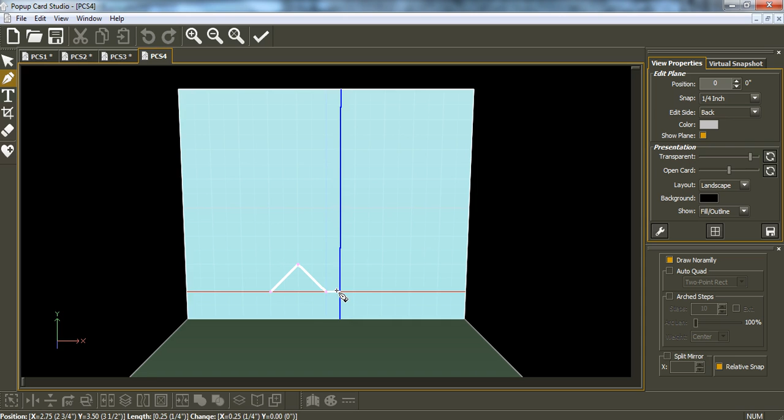So we click here, click there, and click an inch out this way, click, and then I come out and take it around to make this shape. Clicking, not dragging. Click, let go, click on the next one, and so on. So what we end up with is a shape that looks like this.

If I now take the snapping back down, I've got more control over what size to make it, and I'll show you a print preview of this now. If this was to cut, it would cut all out and it would fall out.

Now, before doing a duplicate of this, we're going to use the hinge method. So we click on the hinge and we have the bottom, which is now going to give you a hinged look. We go accept. So if I look at this now, this is what we've just done.

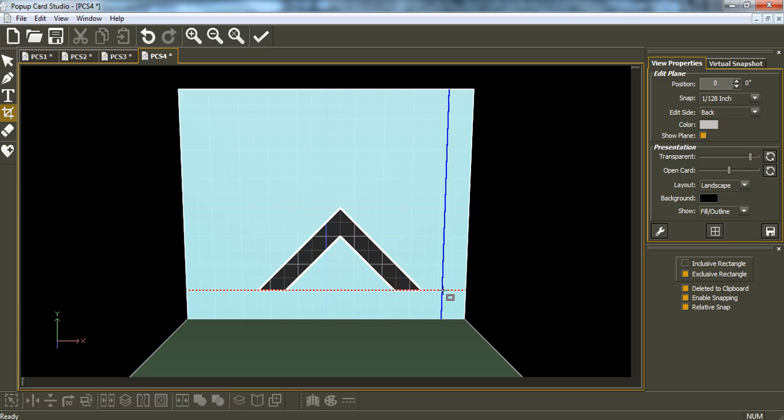Nope, it didn't work. Maybe I wasn't quite straight there. Okay, did I have that selected? When that's selected, I go hinge, accept.

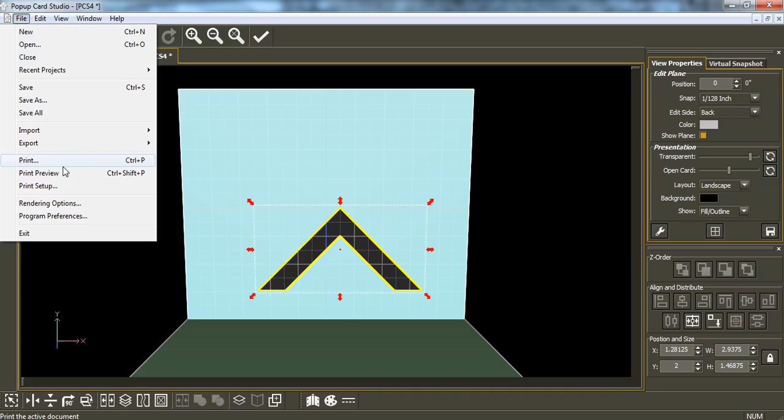And now we'll go print preview. So now what you have, since I didn't have it selected before, you have these cut lines up there, down there, up there, and down there, and it's going to give you a score line at the bottom to fold over.

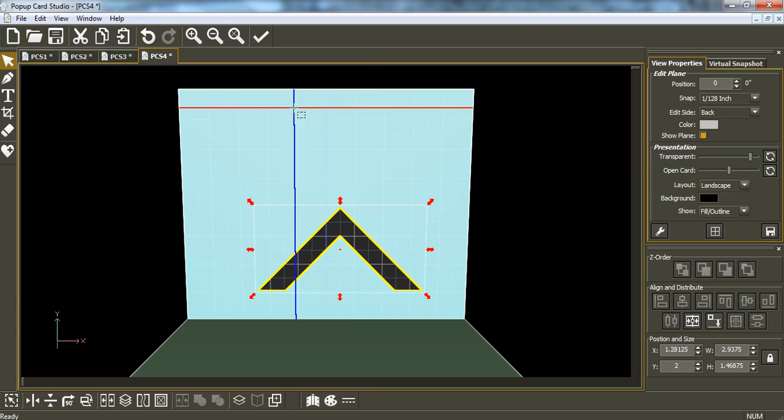So now what we do is we select that, we take it up to the corner, and we put it about the size that you would like it. You can play around with the size even after you've duplicated it. With that selected, you go duplicate, and we go accept.

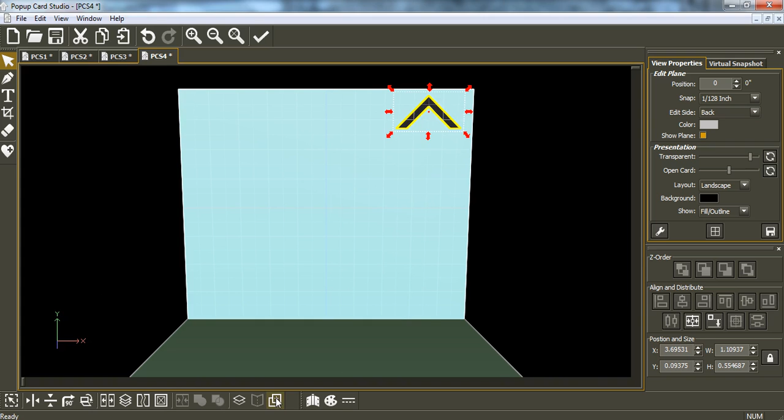And we can resize that, resize it to how you'd like it. So now that's finished. If I show you that in the print preview, it's going to cut up on the top part of the triangle and in the middle of the triangle. It's going to leave these as score lines, and then you have it. So that is now ready to go.

I'll show you, this is not in the making of it, but I'll just show you the outcome that you have. Picturing that this yellow bit that is selected is going to be what's folded down from here. So this will be cut, folded down, this becomes the yellow bit, and it gets tucked under this innermost V that's left there. And so on down the track.

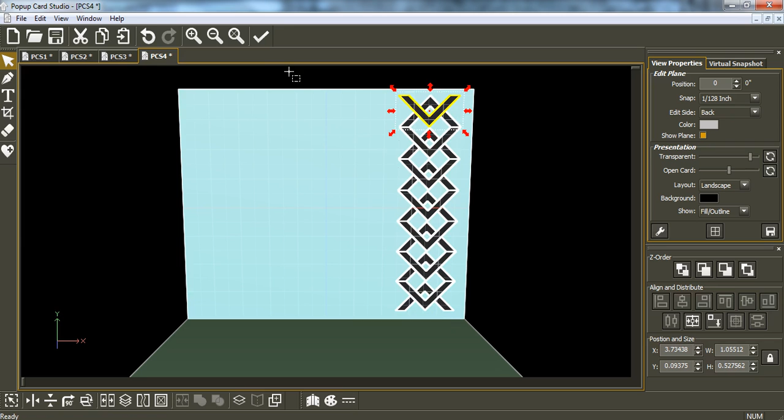And then I take that and put that up there. So that's what you have. So that is now finished.

You aren't limited to just triangles. If we get a new one, and we go on a plane of 0, I click out and zoom in so you can see, what we'll do is we'll get a shape. What will we get today?

We'll get an octagon. No, we'll get a hexagon. So what you do is you now shadow that.

Pick a decent shadow, and go accept. Then select both of them, and go join. This is important - join. Select them both and join.

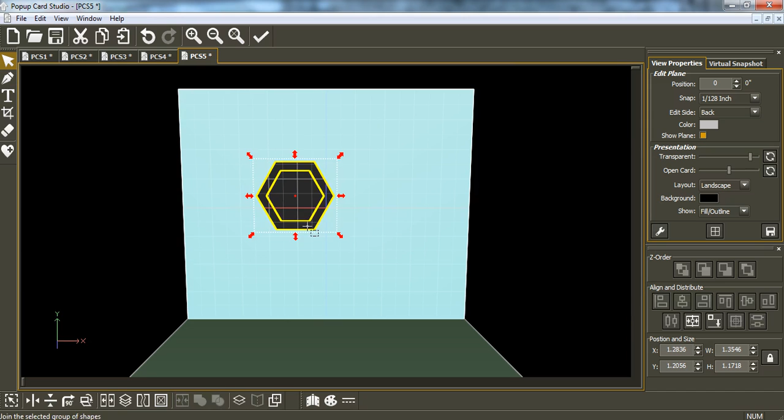Then what we're going to do is chop that in half, because we don't want the bottom half, we only want the top half. And now, what we do is make a hinge of that.

Go accept, and I'll just check before we get any further. Yes, that is a hinge. We go okay, we put that into position. We might want it over here and possibly smaller.

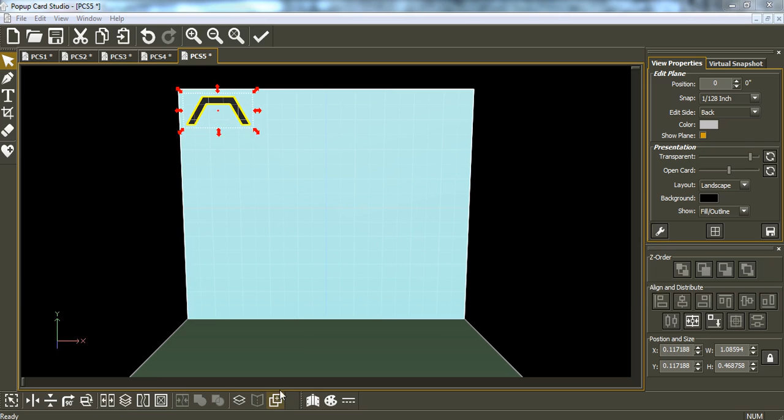So I now duplicate that, and go maybe one up one more, and we go accept, and we put that where we'd like it, and there we have our next lattice.

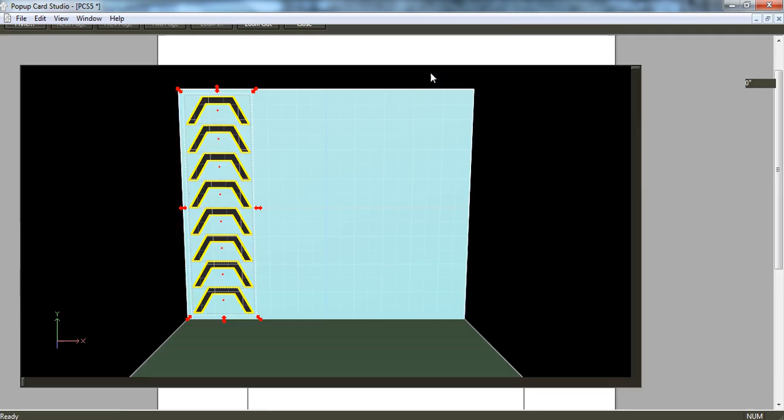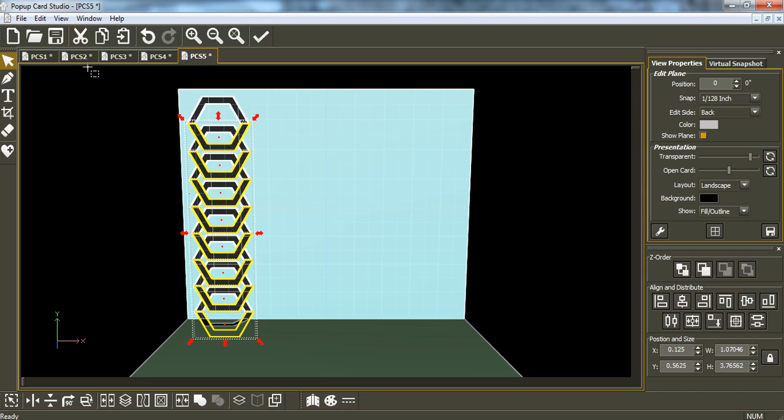So then this one folds over, and this gets tucked under the center of this one, and so on down the track. I'll show you that just by copying that, pasting that, and flipping it. So this would be folding out of there, and it comes down and gets tucked under this one here, but on this one.

That's all there is to making the lattice in here, and the benefit of doing it on here is you've got the score lines to fold, and you'd have your pop up here and other things, and this is just in the background.

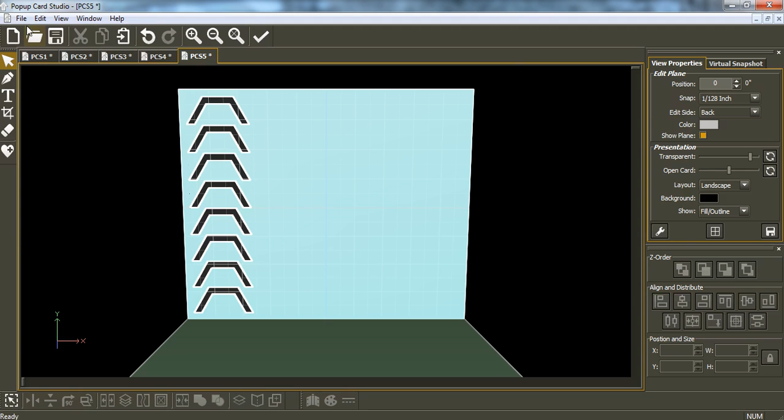Now, if I say I wanted to take that over to make the cut, I would go project render, save as SVG, and I call it hexagon lattice.

And then what I do is go to make the cut, I go import, and I look for the hexagon lattice, and there we have our card.

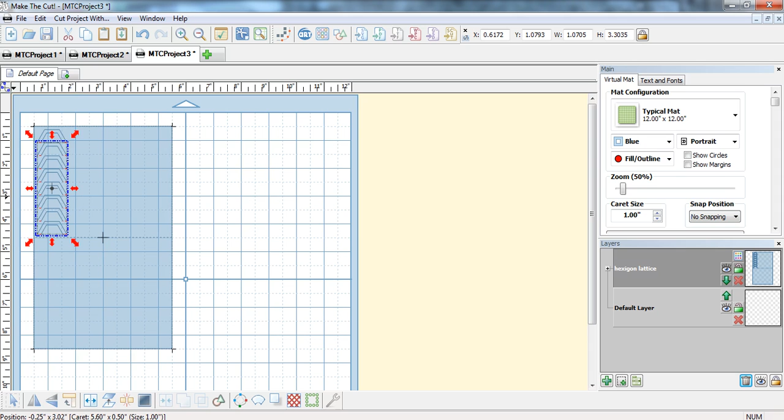You can right click and go export to basic shapes. Now if I call this hexagon lattice and go add.

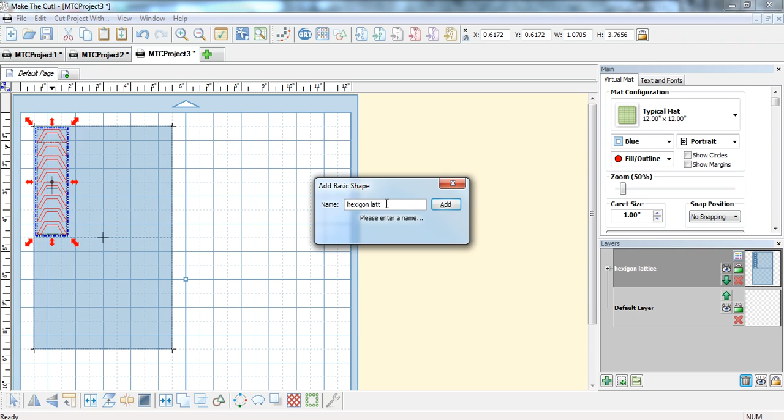So now if I have another project and I want to bring in that lattice, all I have to do is go to your shapes, as in my shapes, find the hexagon lattice, and I can use that on my work and get that onto each its own.

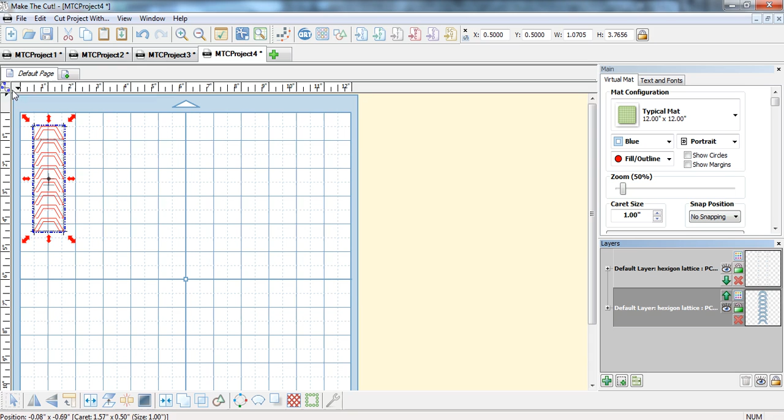So I've got the score marks and the cut marks that you can put on your work. To make this in Make the Cut is the same as in Pop-Up Card Studio.

Except for you don't have the score lines marked for you.

Now, given that if these didn't have score lines, because they're such a small thing, in most card stocks and stuff, you can just pull these down and the creases will be there. You don't need the score lines. So it's quick and easy.

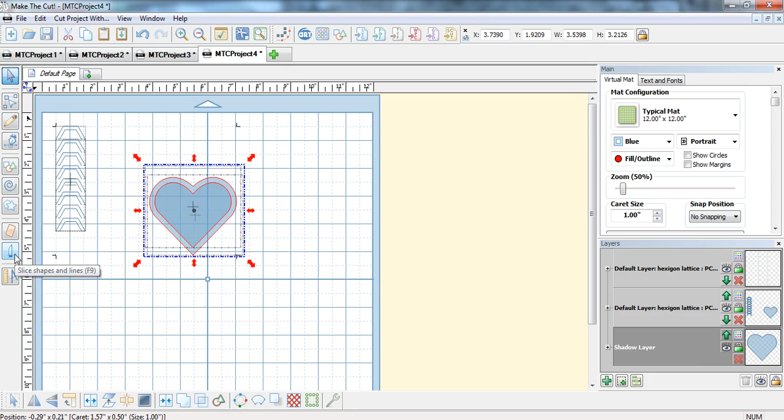I join them both, and I grab my knife and chop halfway through them. Now I'll throw away this half.

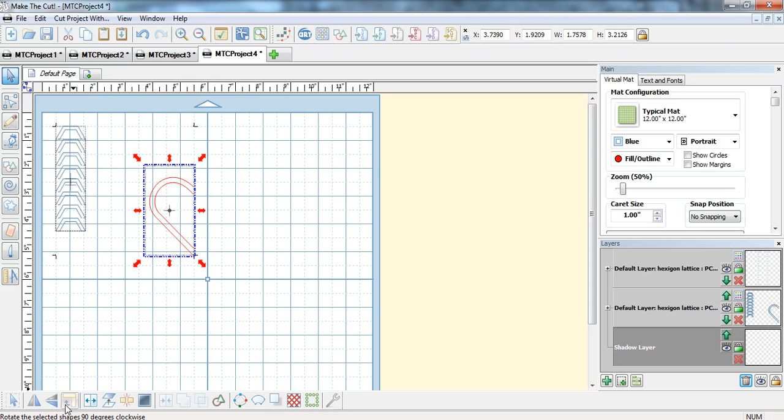I go cut and I rotate that. Then what you have is you just go duplicate. I right clicked to get duplicate, or Control D, Control D, and go apply.

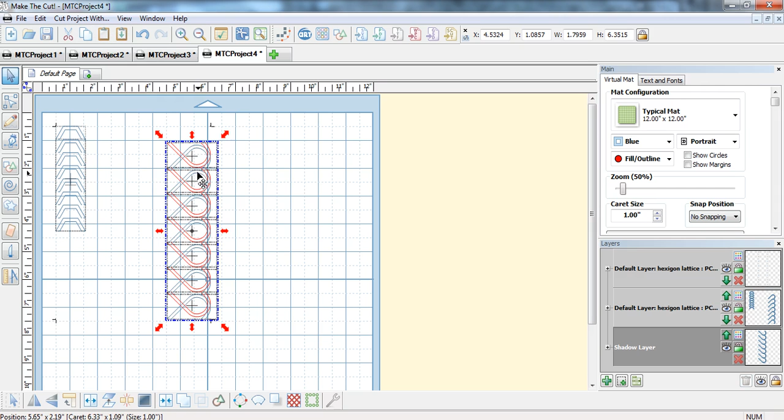So then what I have now is the same principle as what I did in Pop-Up Card Studio - I have my pieces. Now if I was to go copy and paste and flip them and bring that down, this is what you'll end up with.

This one here will end up tucked in under this cutout in the center. So it's endless what shapes you can use.